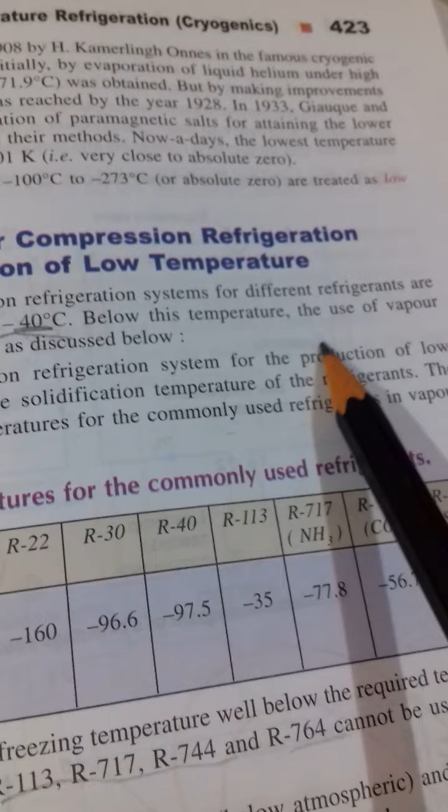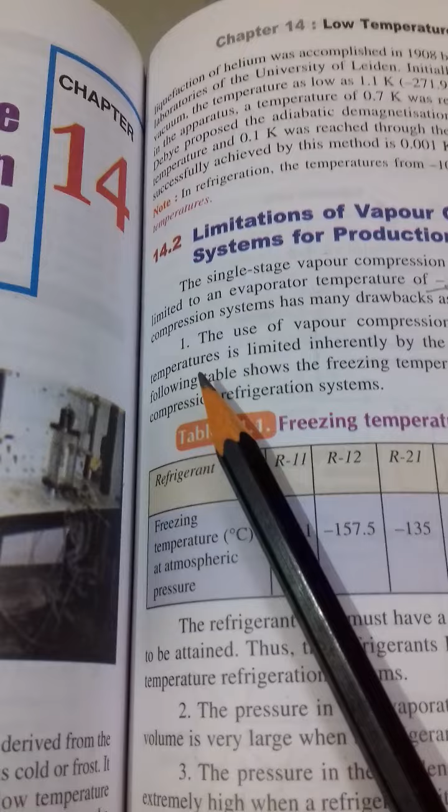The use of vapor compression system has many drawbacks as discussed below. What are the drawbacks? The use of vapor compression refrigeration system for the production of low temperature is limited inherently by the solidification temperature of the refrigerant.

The following table shows the freezing temperature for commonly used refrigerants in vapor compression refrigeration system, given in degree centigrade at atmospheric pressure.

The refrigerant used must have a freezing temperature well below the required temperature to be attained. Thus, refrigerants R113, R717, R744 and R764 cannot be used for low temperature refrigeration systems.

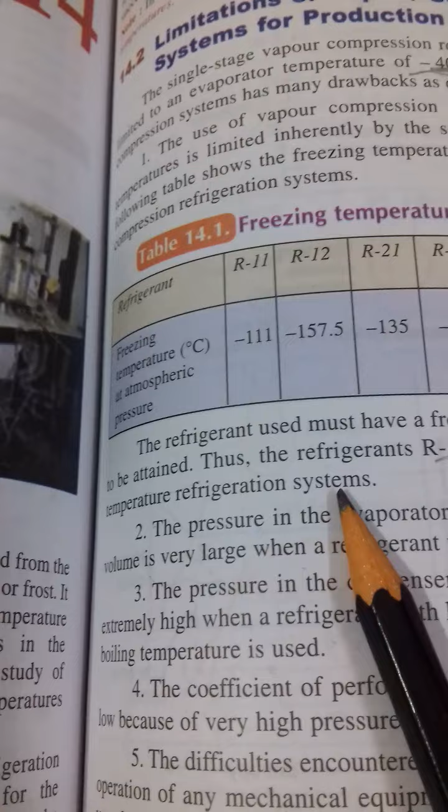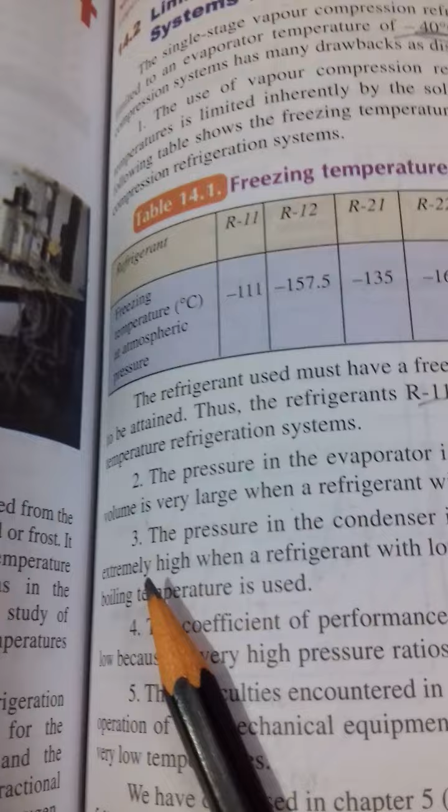Second point: the pressure in the evaporator is extremely low, below atmospheric, and the suction volume is very large when a refrigerant with high boiling temperature is used. Third point: the pressure in the condenser is extremely high when a refrigerant with low boiling temperature is used.

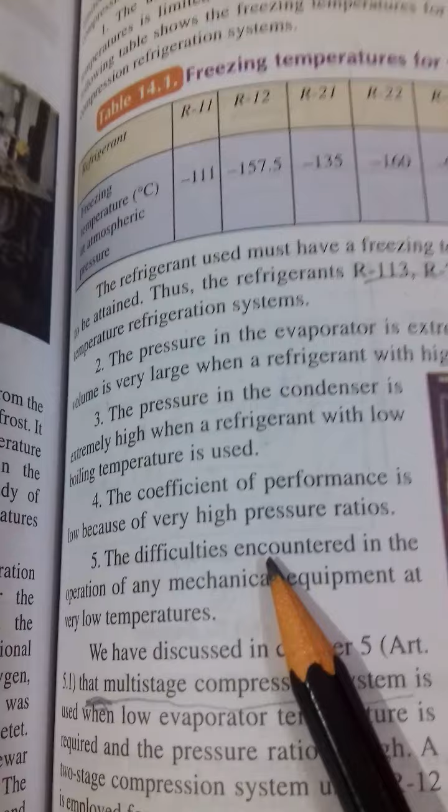Fourth point: the COP is low because of very high pressure ratio. Fifth point: the difficulty encountered in the operation of any mechanical equipment at very low temperature. This causes difficulty problems at low temperature.

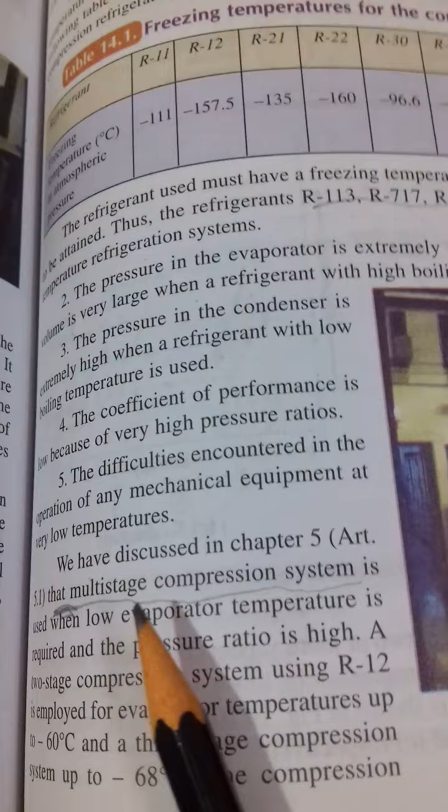As discussed in this chapter, multi-stage compression system is used when low evaporator temperature is required and the pressure ratio is high.

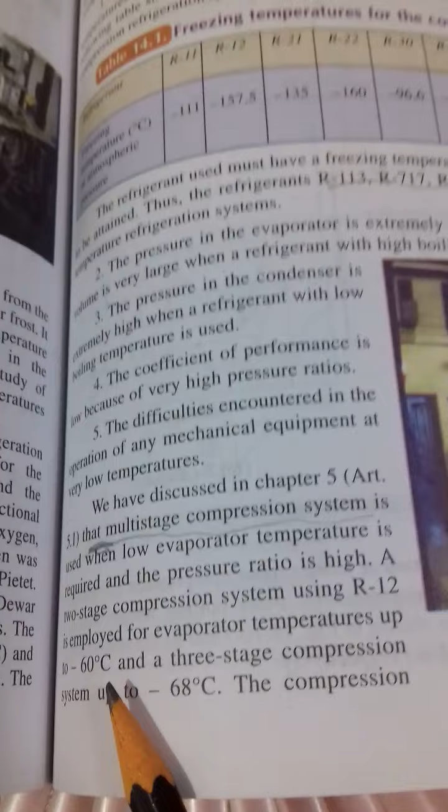A two-stage compression system using R12 is employed for evaporator temperature up to -60 degree centigrade, and three-stage compression down to -68 degree centigrade. The compression system with R22 operates satisfactorily at 5 to 10 degree centigrade lower temperature.

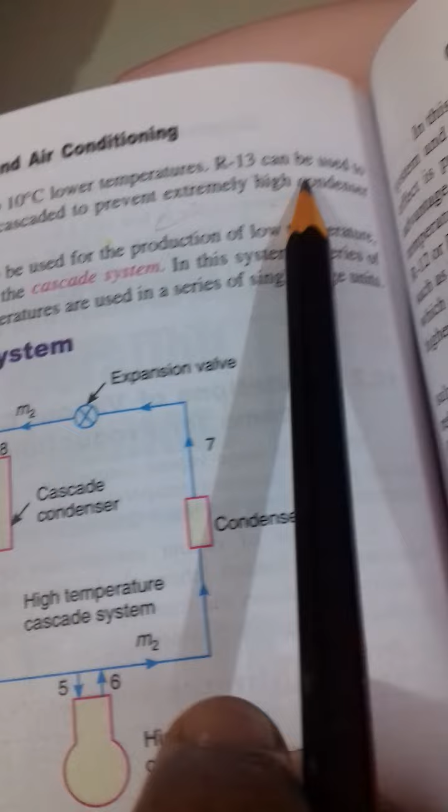R13 can be used for temperatures well below -100 degree centigrade, but must be cascaded to prevent extremely high condenser pressure, as the critical temperature is 28.8 degree centigrade.

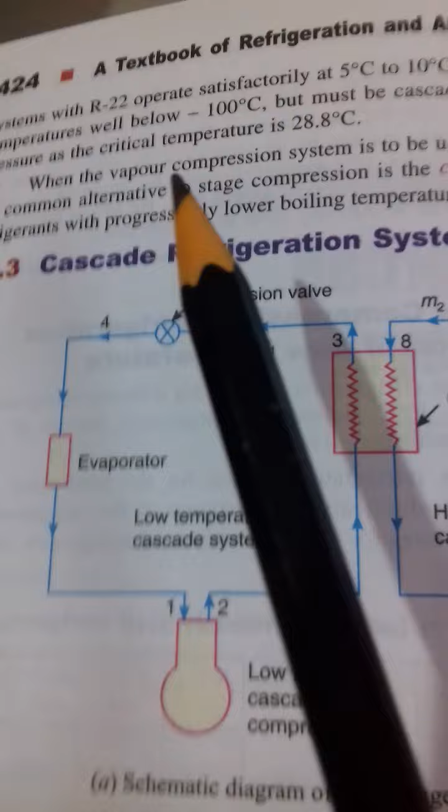When the vapor compression system is to be used for production of low temperature, the common alternative to stage compression is the cascade system. This cascade system is very important; usually questions come on cascade system.

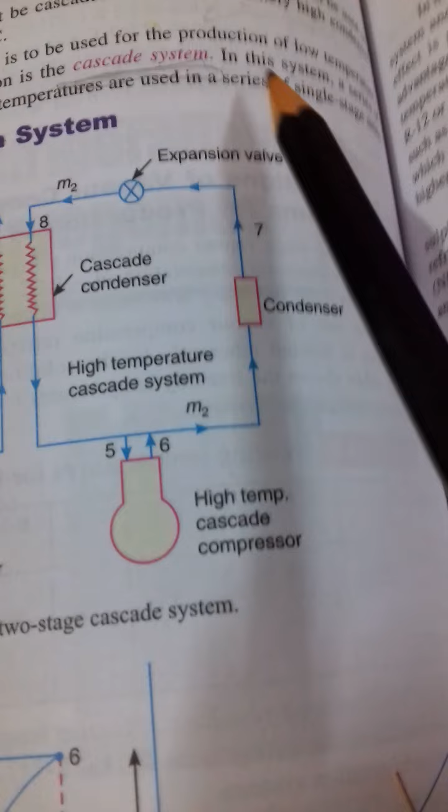In this system, a series of refrigerants with progressively lower boiling temperature are used in a series of single stage units.

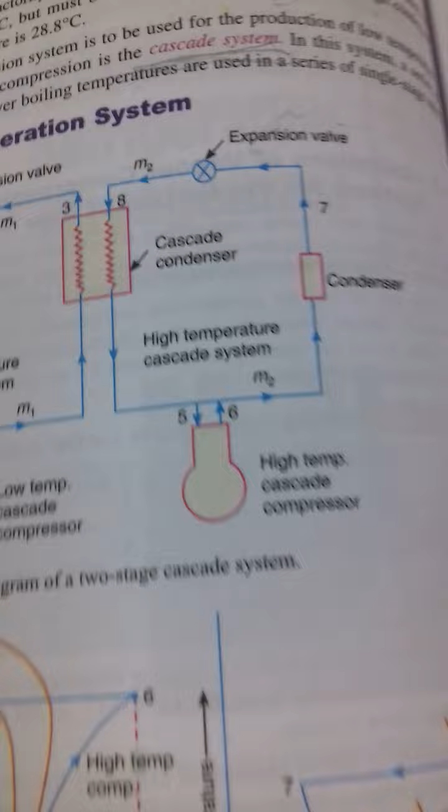Now see, this is the cascade system. There are two systems working at the same time - this is your cascade system. This is the schematic diagram of a two-stage cascade system, where one separate compressor is there.

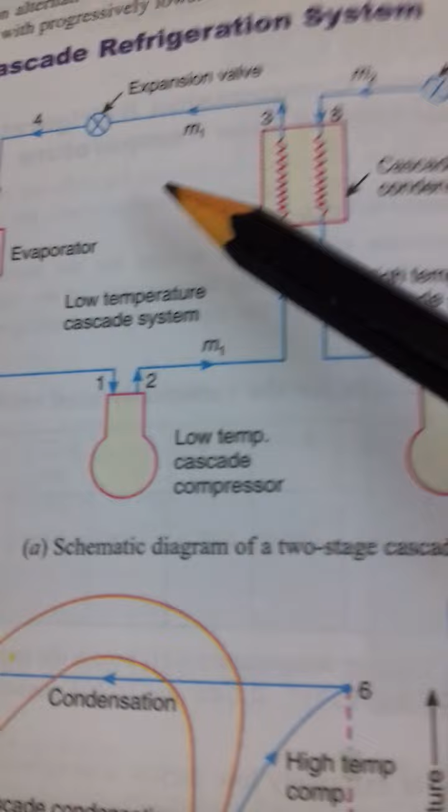This is the high temperature cascade system: compressor, then condenser, then expansion valve, and then evaporator. Now this evaporator is linked with another set of vapor compression cycle, of which the condenser is linked with the evaporator of the first one. So in the high temperature cascade system we have compressor, condenser, expansion valve, and evaporator.

Now another part, the low temperature cascade system, has compressor, then again condenser and expansion valve, then evaporator. Here in the evaporator we will get extremely low temperature.

The mass of refrigerant traveling in the first one is M1, traveling in the low temperature side, and M2 mass is traveling in the high temperature side.

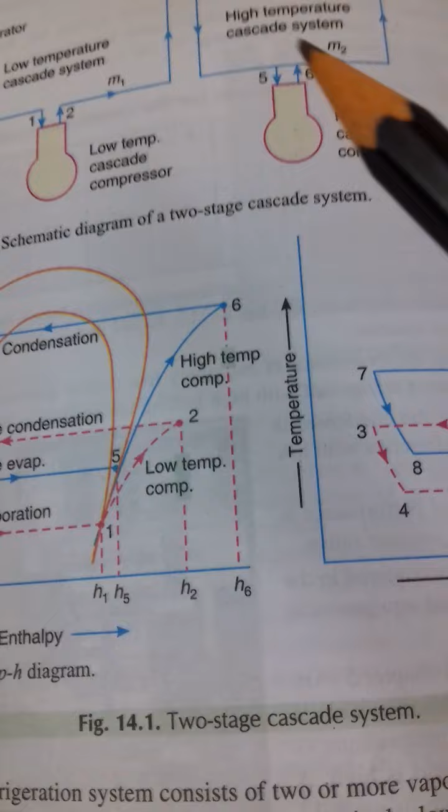Now this has been shown on your PH diagram. See, PH diagram and TS diagram, both diagrams are here. PH, that is pressure enthalpy curve. There are two refrigerants flowing, one in the low temperature side and one in the high temperature side.

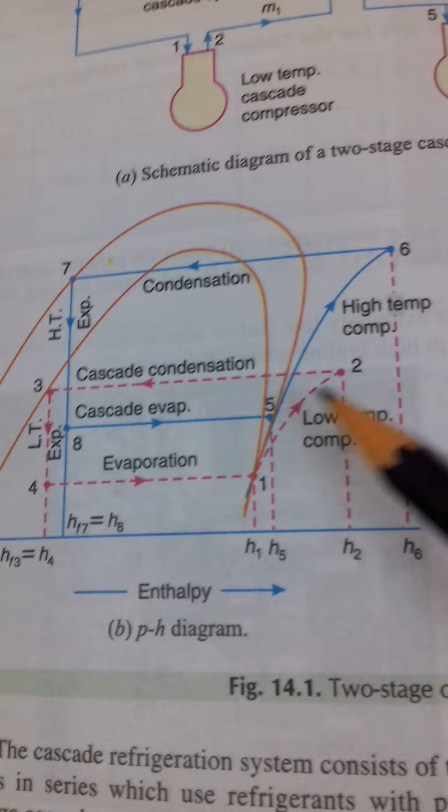Another cascade system is shown by 5-6-7-8. So the cascade condenser and cascade evaporator - one of the evaporators and one of the condensers - are mixed with each other.

Here in the figure you see this is the cascade condenser - here it is your evaporator of the high temperature side and condenser of the low temperature side. Both have been combined with each other so that heat exchange may take place.

So here also it has been shown on the PH diagram, pressure enthalpy diagram. Two curves have been shown separately, one for low temperature refrigeration and another for high temperature refrigeration. Here again we can see it shown on the temperature entropy diagram.

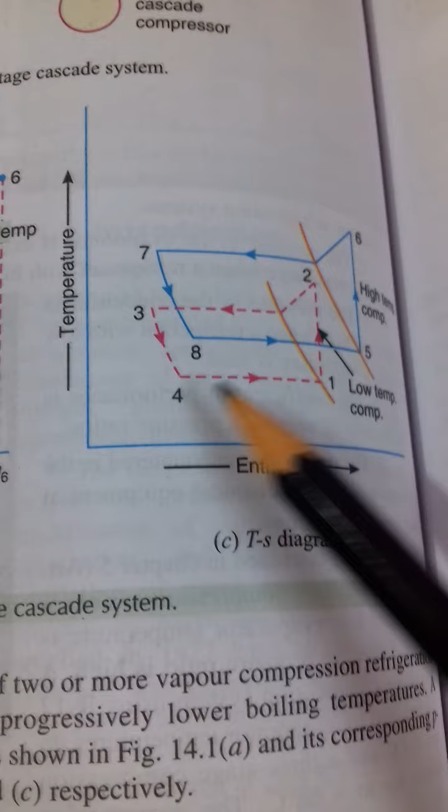Again 1-2-3-4, that is the first part, for low temperature cascade system. And again 5-6-7-8, that was for the high temperature cascade system. Now again here you will find that the low temperature condenser and high temperature evaporator have been mixed with each other in a heat exchanger.

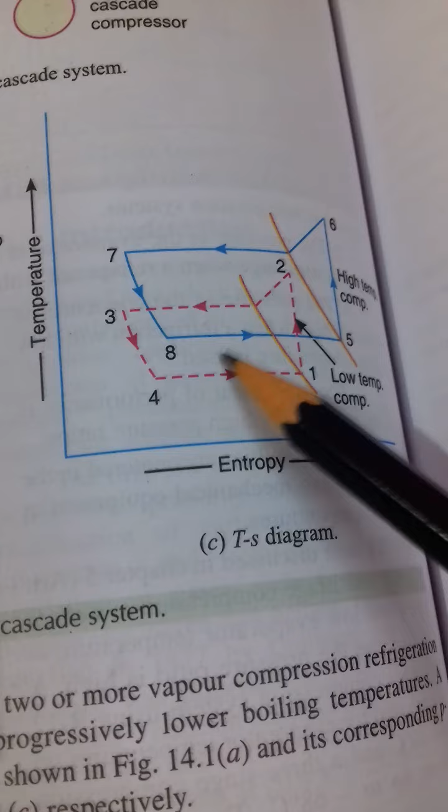So heat exchange takes place over here. This is your PH diagram and this is the TS diagram for your cascade system.

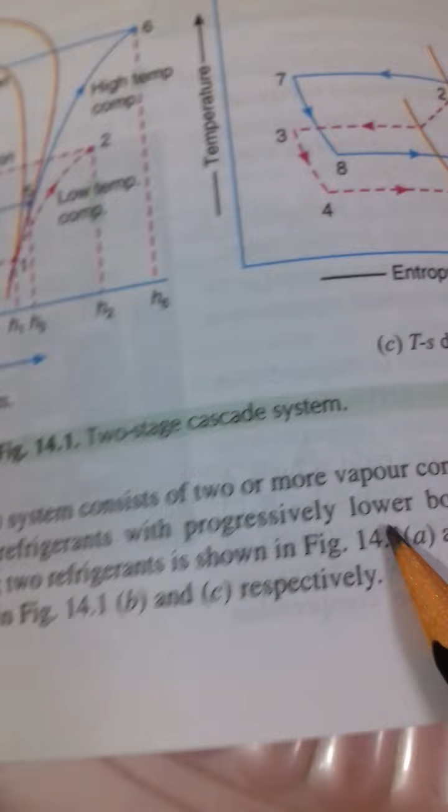The cascade refrigeration system consists of two or more vapor compression refrigerant systems in series, which use refrigerants with progressively lower boiling temperature. A two-stage cascade system using two refrigerants has been shown in the figure.

Two refrigerants have been shown in the figure. Two systems are there: one is the high temperature cascade, and the other is the low temperature cascade. It has been shown over here.

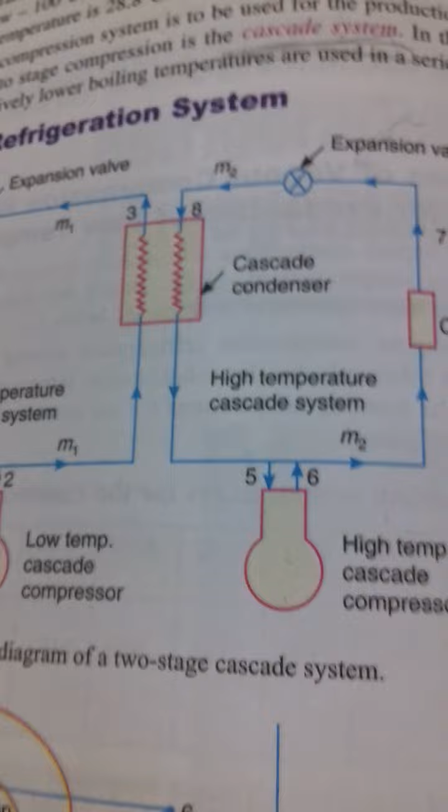And so in the figure, its corresponding p-h and T-s diagram has been shown.

Next point: in this system, a cascade condenser serves as an evaporator for the high temperature cascade system, and a condenser for the low temperature cascade system.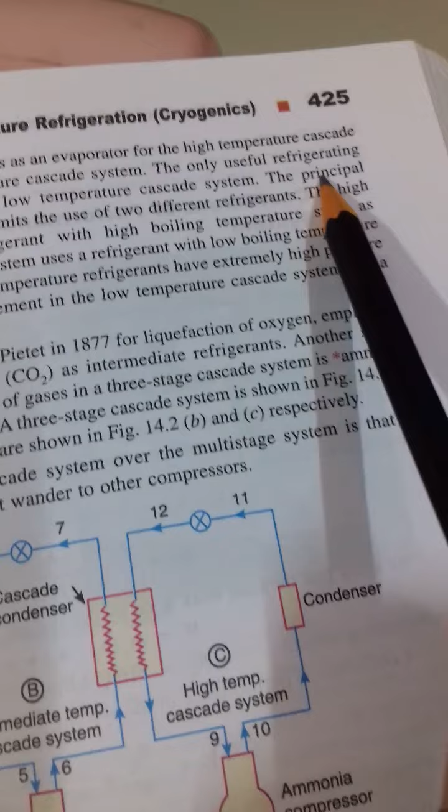The only useful refrigerating effect is produced in the evaporator of the low temperature cascade system.

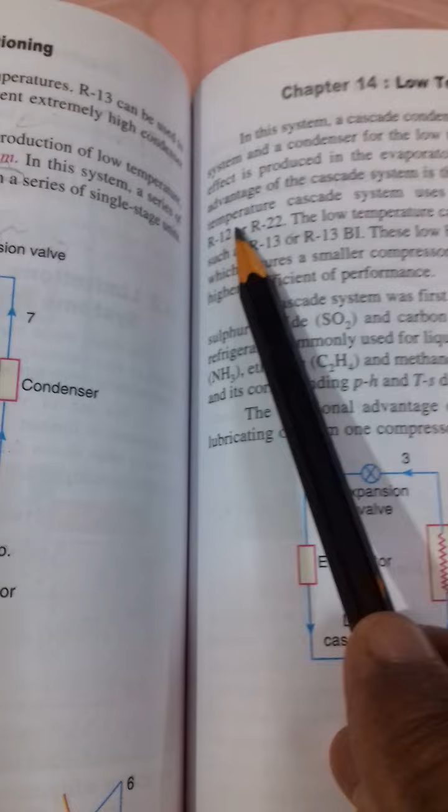The principal advantage of the cascade system is that it permits the use of two different refrigerants. The high temperature cascade system uses a refrigerant with high boiling point temperature, such as R12 or R22.

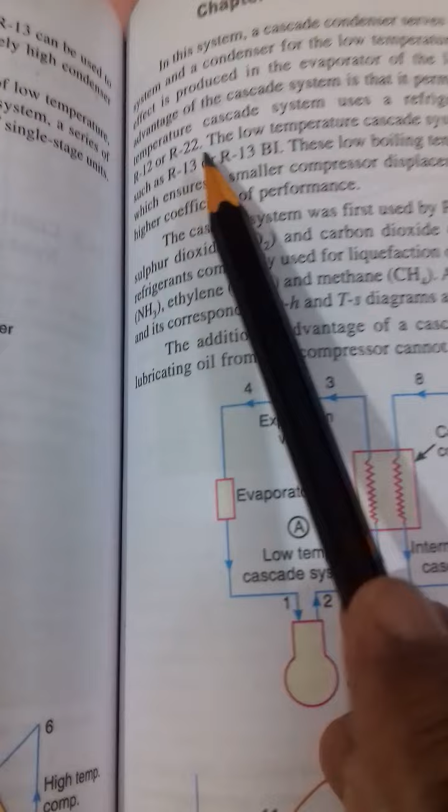The low temperature cascade system uses a refrigerant with low boiling point temperature, such as R13 or R13B1. Those low boiling temperature refrigerants have extremely high pressure.

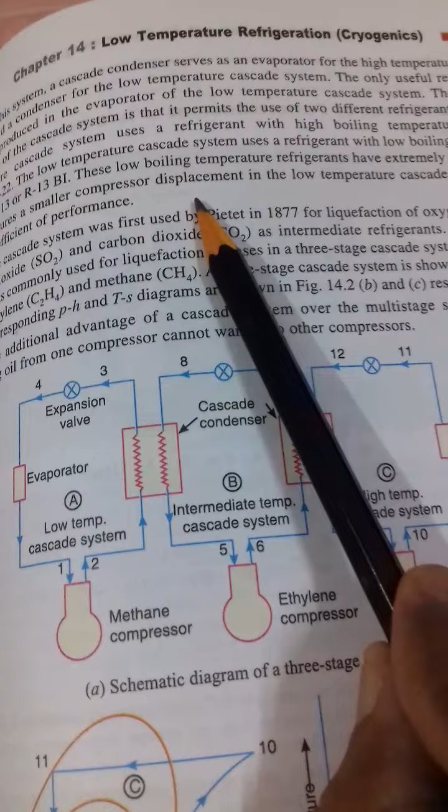which ensures a smaller compressor displacement for the low temperature cascade system and a higher coefficient of performance.

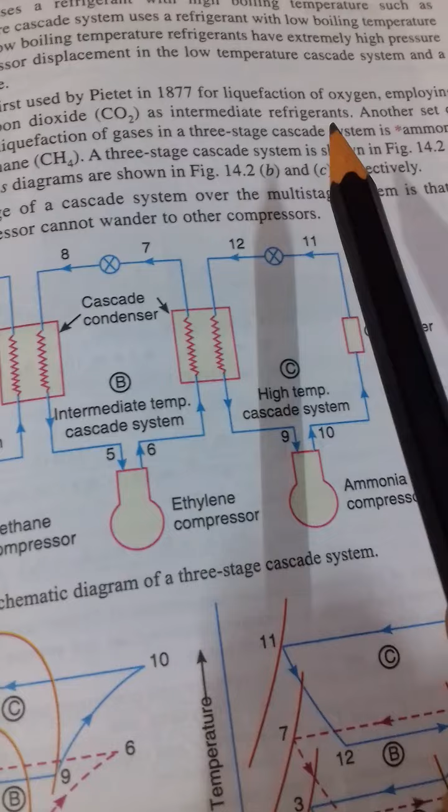The cascade system was first used for the liquefaction of oxygen, employing sulfur dioxide and carbon dioxide as the intermediate refrigerant.

Another set of refrigerants commonly used for liquefaction of gases is in a 3-stage cascade system.

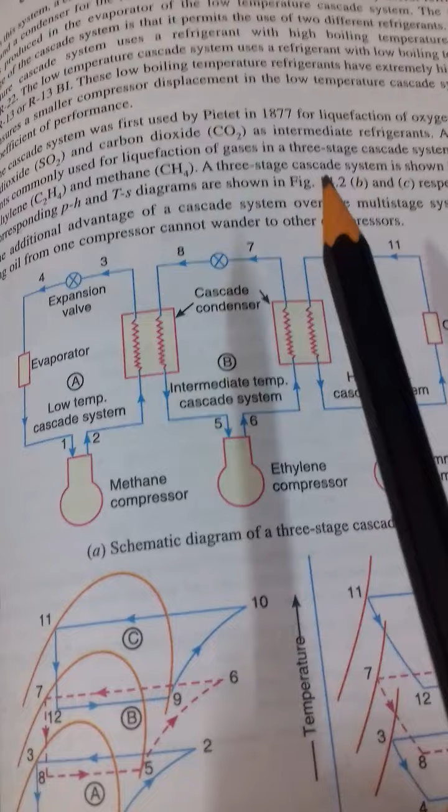A 3-stage cascade system is shown in the figure, and the corresponding p-h and T-s diagrams are also shown in the figure.

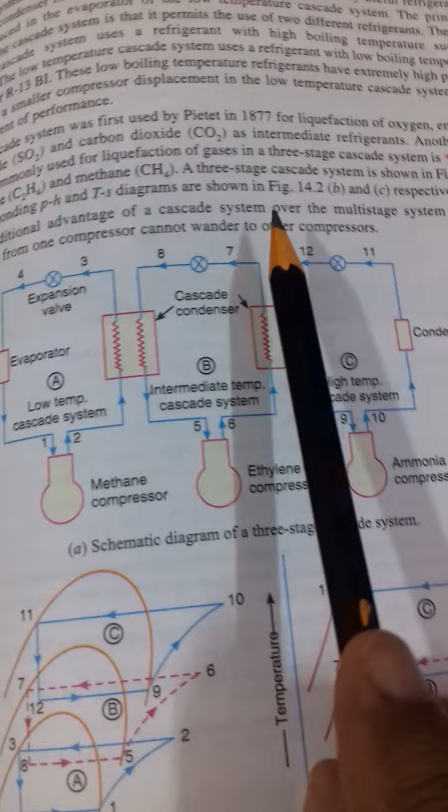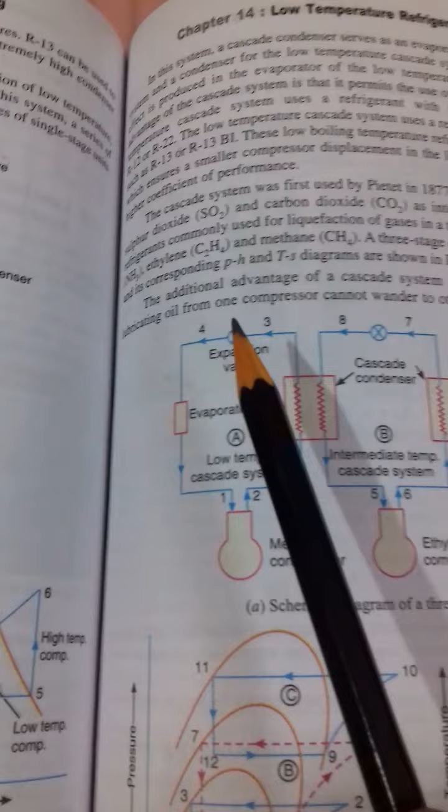The additional advantage of the cascade system over the multi-stage system is that the lubrication oil from one compressor cannot wander into the other.

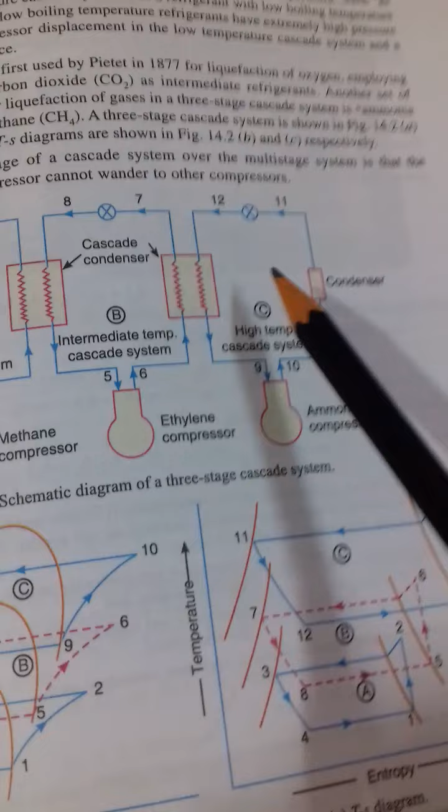one mix in a common heat exchanger, and finally we get the evaporator at point A. So this is the schematic diagram of the 3-stage cascade system.

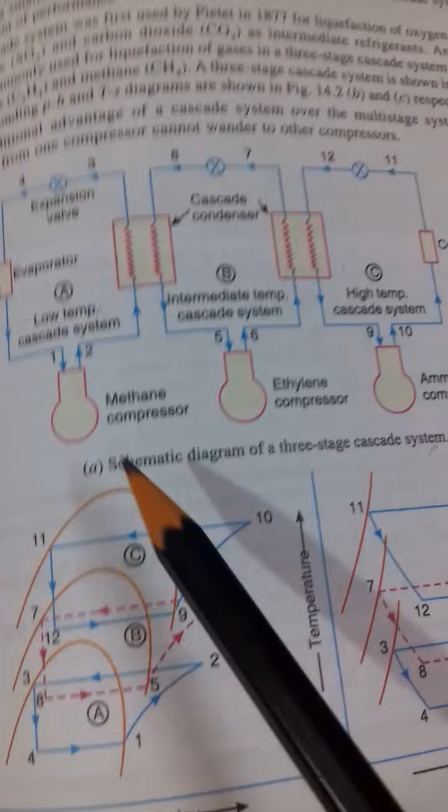This is your schematic diagram of the 3-stage cascade system. It has been shown on the TS diagram also and the ph diagram also.

See, three curves are visible over here. The refrigerants may be three refrigerants that we normally use: ammonia, ethylene (C2H4), and methane. Ammonia, ethylene and methane — three refrigerants separately are used, and finally we get a very low temperature over here.

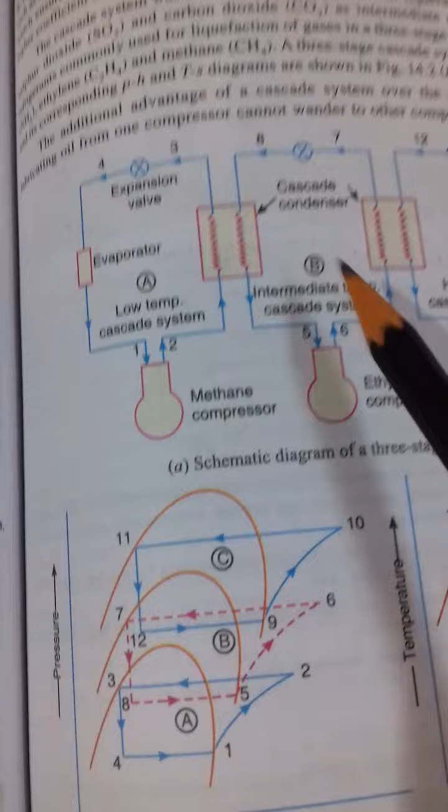Now the figure which is shown over here on the ph diagram, pressure enthalpy diagram: three refrigerants are given and they have got separate arrangements. Points 1 2 3 4, where 4 is your lowest temperature.

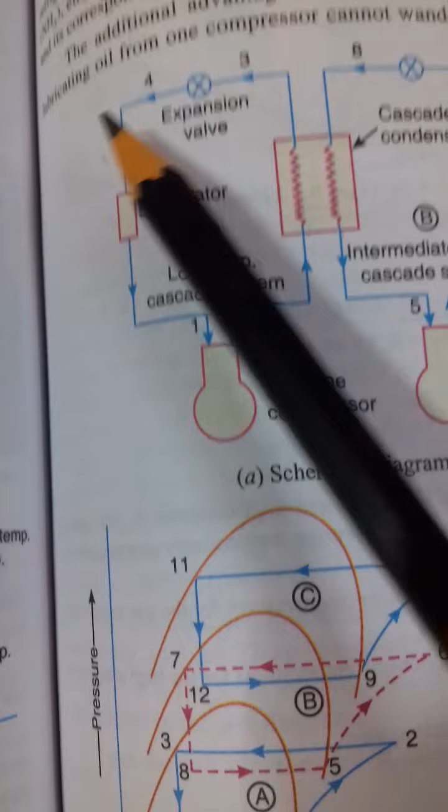This is the low temperature cascade: this evaporator, this condenser, is mixed with the middle one. Then again points 5 6 7 8, that is the middle one.

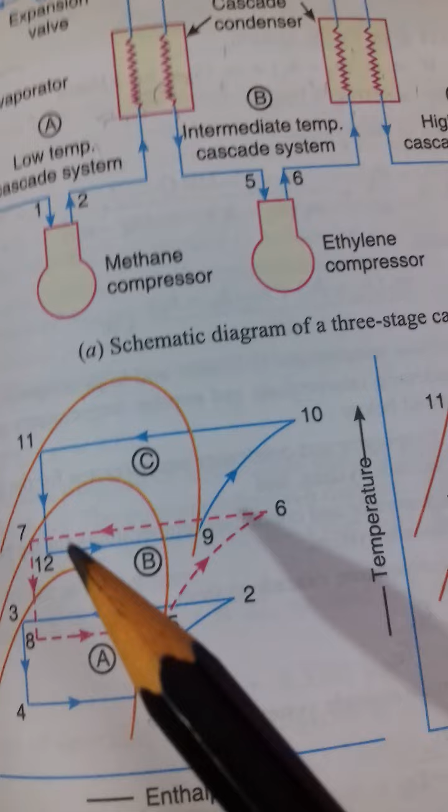Now the condenser of this one, the evaporator of this one, is mixed with the condenser of the low temperature one. And again the last one, that is points 9 10 11 12.

So these are the three systematic stages of cascade, shown over here in the ph diagram. We have got the TS diagram also for the same.

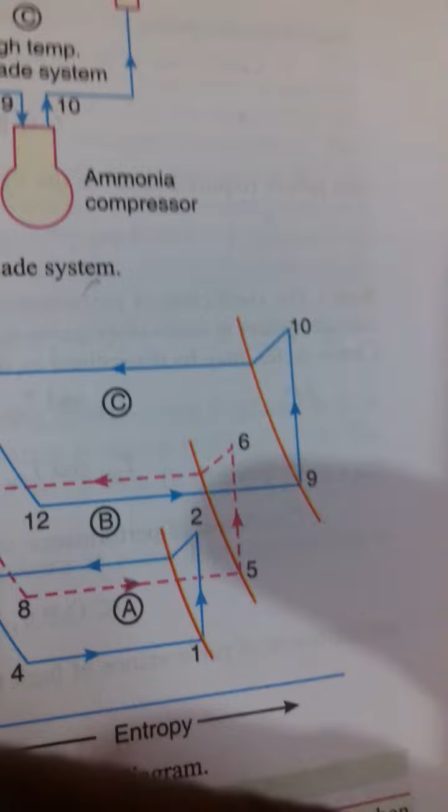And see three parts: 1 2 3 4, and another part 5 6 7 8, and the last one 9 10 11 12.

So three systems have been integrated, and the main property of this cascade system is that the oil of one compressor cannot wander into another one.

Oil cannot go into another one. But in a multi-stage compressor, the oil may travel from one compressor to another. Here, because the systems are separated, there is no question of mixing the oil from one to another. This is the main advantage of the cascade system, and we get the lowest temperature at the evaporator of the last one.

This is the two-system cascade, and this is the three-system cascade. PH diagram, TS diagram — it is quite clear from here.

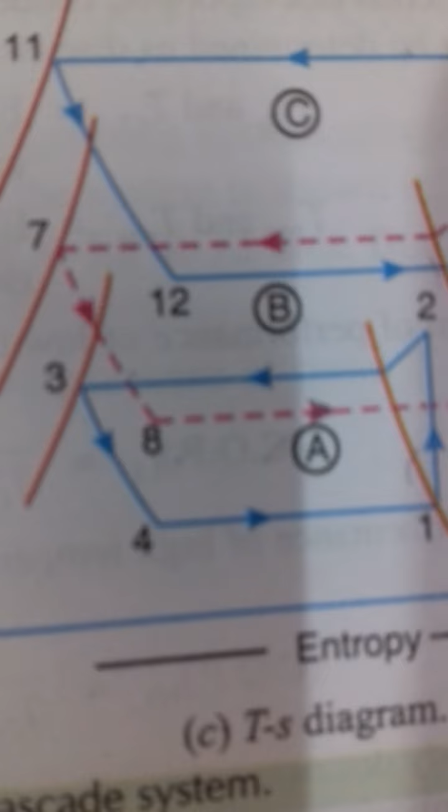TS diagram for the three: 1 2 3 4, then again 5 6 7 8, and then finally 9 10 11 12. So we have got three cascades, three schematic diagrams for the three-stage cascade system.

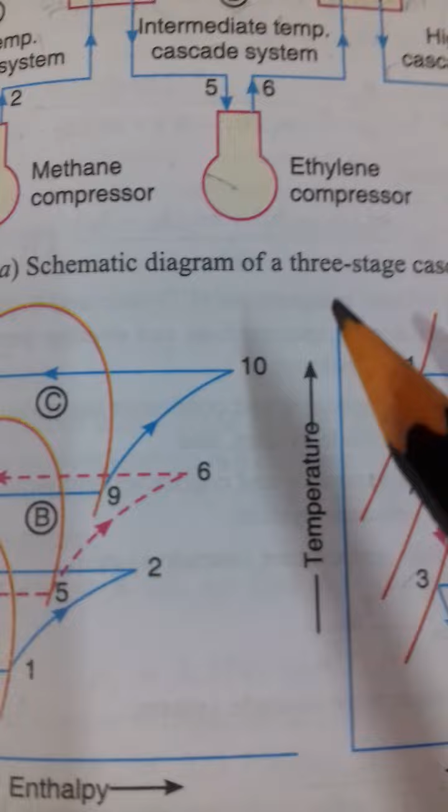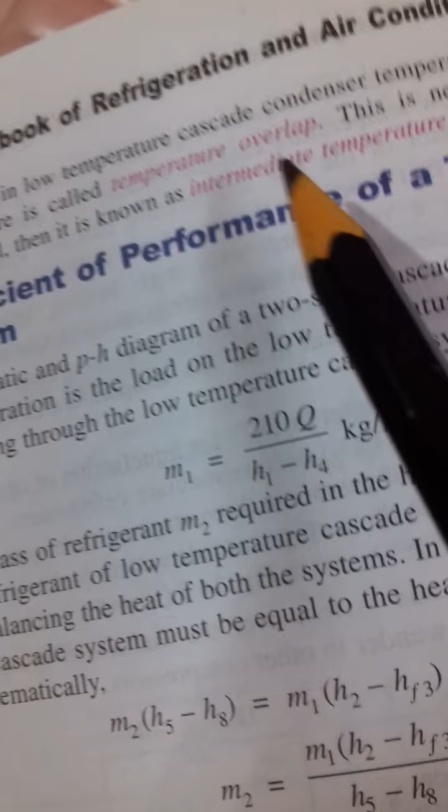Now note, this is an important point: the difference in low temperature cascade condenser temperature and high temperature cascade evaporator temperature is called the temperature overlap.

This is necessary for the heat transfer. If these temperatures are equal, then it is known as the intermediate temperature.

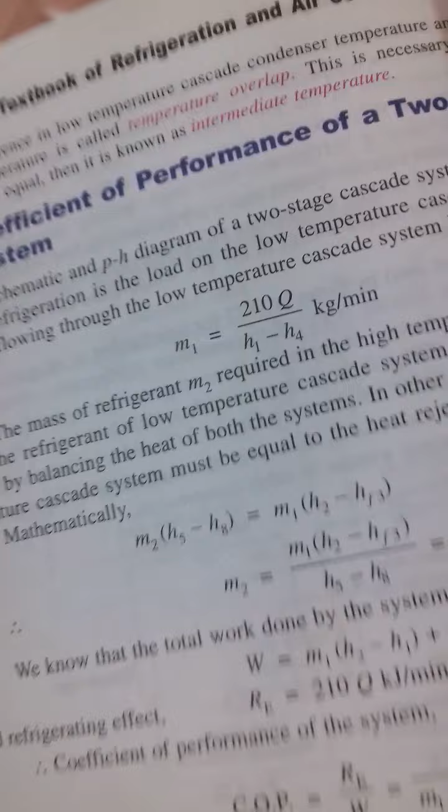Now, coefficient of performance. We will come to the coefficient of performance of the three-stage cascade system. The schematic and PH diagram of the two-stage cascade system is shown in the figure.

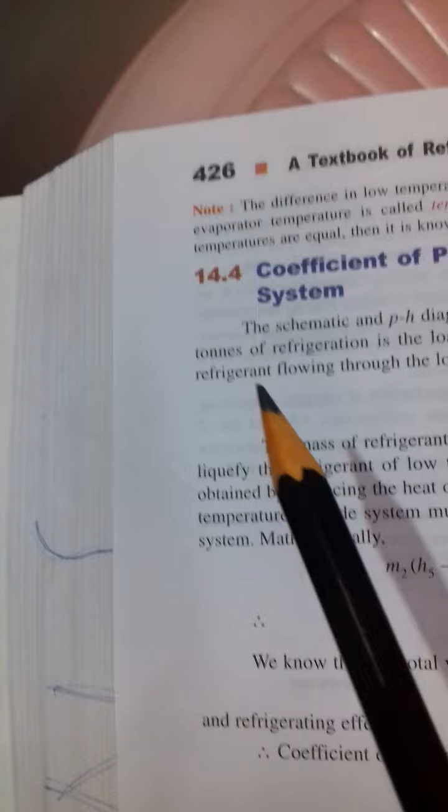As shown in the figure, if Q tonnes of refrigeration is the load on the low temperature cascade system, then...

The mass of the refrigerant flowing through the low temperature cascade system is given by M1 = 210Q / (H1 - H4), in kg per minute. The mass of the refrigerant M2 required in the high temperature cascade system is...

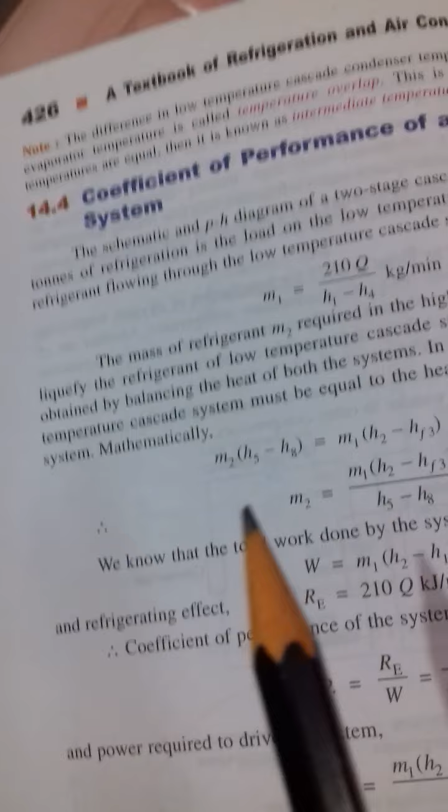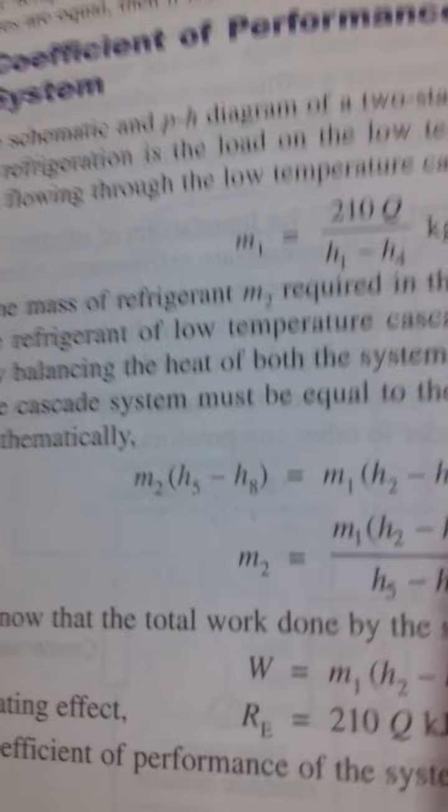So in that way, for M2 mass, we will go for the heat balance for this cascade condenser, and we can say that M2 into (H5 - H8) is equal to M1 into (H2 - Hf3). So the value of M2 can be found in terms of M1: M1 into (H2 - Hf3) divided by (H5 - H8).

In kg per minute. Now, the work done will be M1(H2 - H1) plus M2(H6 - H5), in kilojoules per minute.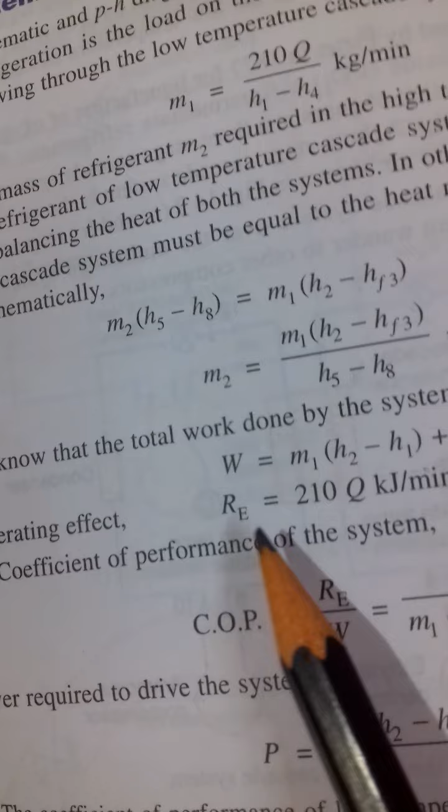The refrigerating effect will be given as RE = 210Q, where Q is the load which is given. The coefficient of performance of the system is RE upon W, standard is 210 upon work done by both compressors: M1(H2-H1) + M2(H6-H5), and the power required is given by the mechanical work divided by 60.

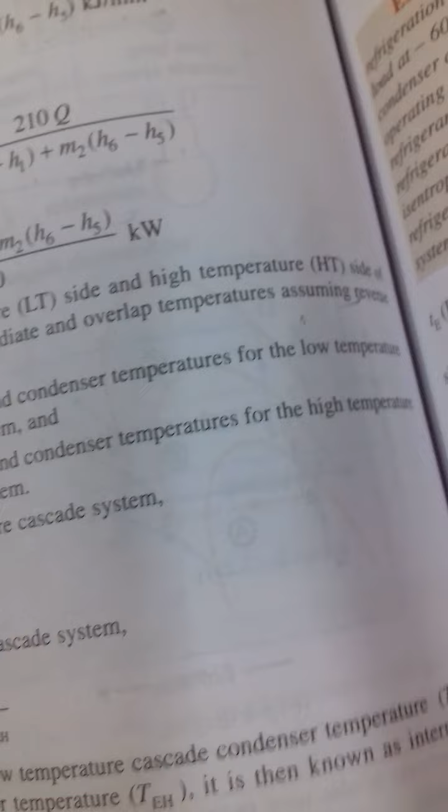Note the coefficient of performance of the low temperature side and high temperature side of the cascade system, in terms of evaporator, condenser, intermediate and overlap temperature, assuming reverse Carnot cycle, may be determined as discussed.

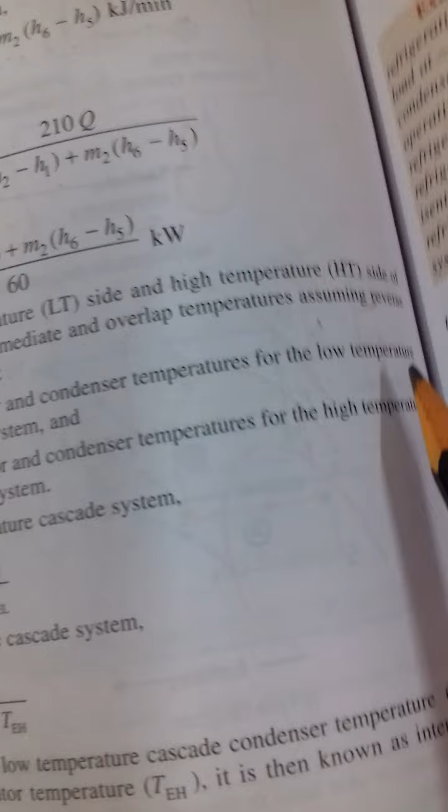Now TEL and TCL are the evaporator and condenser temperature for the low temperature cascade system, and TEH and TCH are the evaporator and condenser temperature for the high temperature cascade system.

Coefficient of performance of the low temperature cascade system is given by COP(LT) = TEL divided by (TCL - TEL), that is the cooling effect upon the work done, and from the Carnot cycle, it is the low temperature upon the difference in temperature.

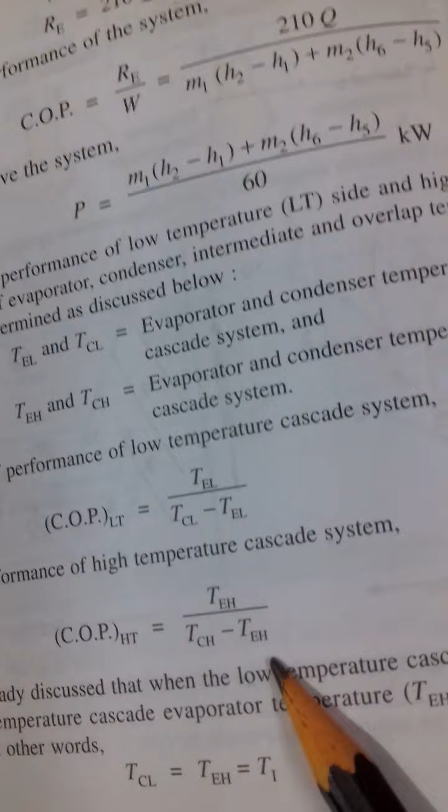And the coefficient of performance for the high temperature cascade is given by COP(HT) = TEH divided by (TCH - TEH), that is the reverse Carnot cycle, the evaporating effect divided by the change in temperature. We have already discussed that when the low temperature cascade condenser temperature TCL equals the high temperature cascade evaporator temperature TEH, it is known as the intermediate temperature.

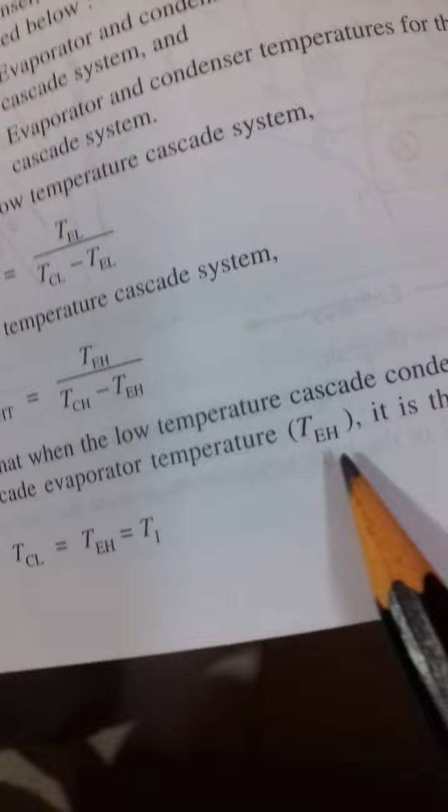In other words, TCL = TEH = TI. Let us see the figure: here the condenser temperature, the evaporator temperature, and this condenser temperature, when heat exchange goes on, after some steady state both temperatures become equal. So from that, TCH, TEH and TCL relationship is established.

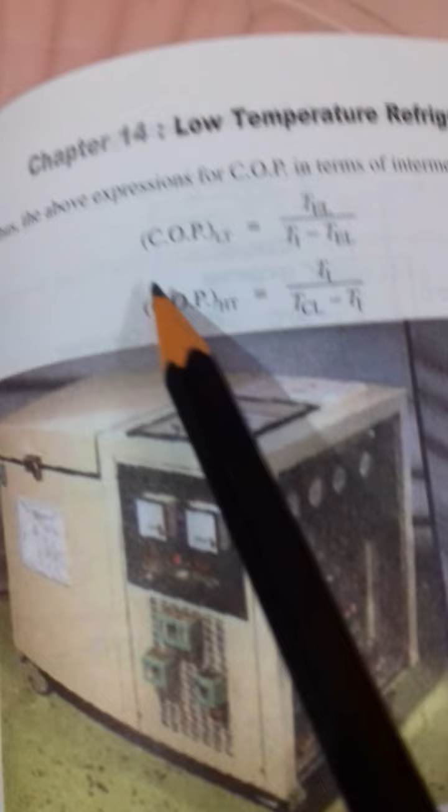So we can say that the above expressions for the COP in terms of intermediate temperature T1 may be written as: COP for lower temperature = TEL / (T1 - TEL), and COP for higher temperature = T1 / (TCL - T1).

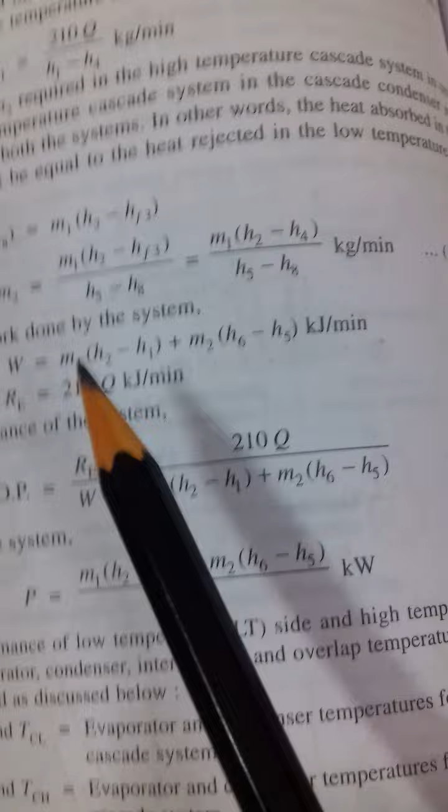Or in the three stage cascade, we get the lower temperature in the low temperature cascade system, the last one. In that way we can get very low temperature for the liquefaction of gases which do not liquefy in the ordinary way.

They do not liquefy in the ordinary way. So we can say that the cascade system is more applicable for obtaining low temperature. For obtaining low temperature, cascade systems are the best, and that is being used.

And the main advantage is that oil transfer from one compressor to another does not take place. Oil only travels in its own circuit. That is the main advantage of this cascade system. And besides that, we get the low temperature also. So low temperature is achieved and oil mixing is not there. In that way, we can get the low temperature.

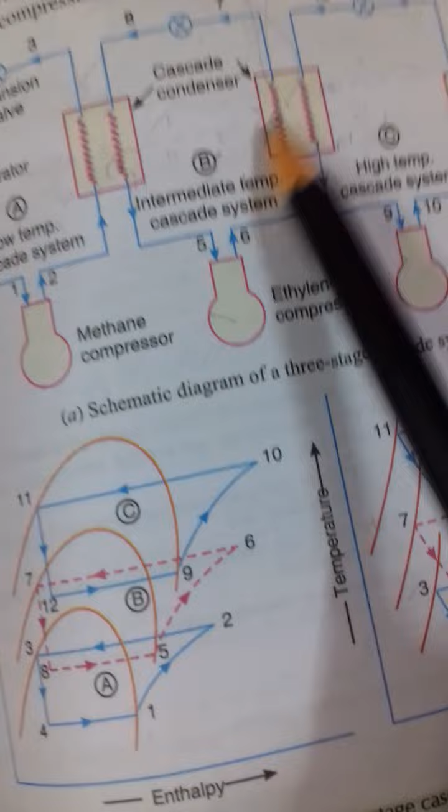Cascade system is very important. Normally, questions on the cascade system are asked in examinations also, so one should be very clear. We have covered the T-S diagram and P-H diagram for both systems, and for the 3-stage cascade also we have shown the P-H and T-S diagrams. That's all, okay, thank you.